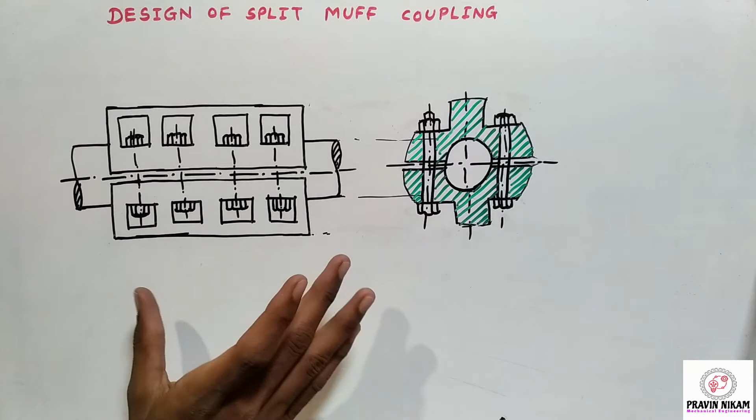So let us see, this is the split muff coupling. This is the front view, this is the side view. Now in the front view you can see what is there. This is the input shaft, and this is the output shaft.

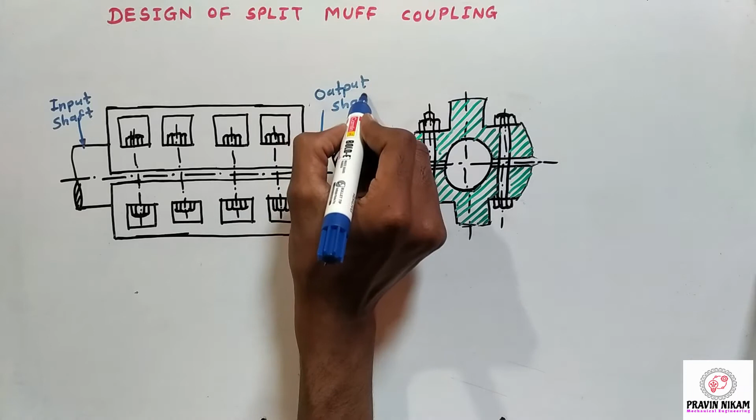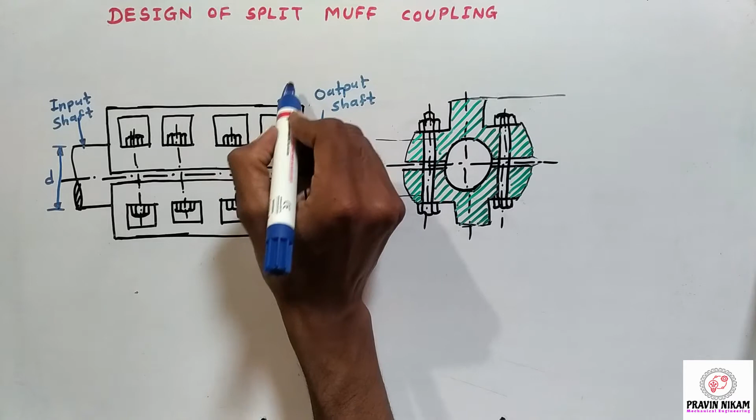Now the diameter of the input shaft is small d, diameter of the output shaft is small d. Then diameter of this sleeve - this is called sleeve. This is half of the sleeve, and this is another half of the sleeve. Inside you can see this is one half of the sleeve, this is the other half, and the clearance is provided between the two halves of the sleeve.

So this is also called a compression coupling or clamp coupling, because the two halves of the muff are clamped together by means of a number of bolts. Now this number of bolts is 4, 8, 12, 16, like this - in the multiple of 4.

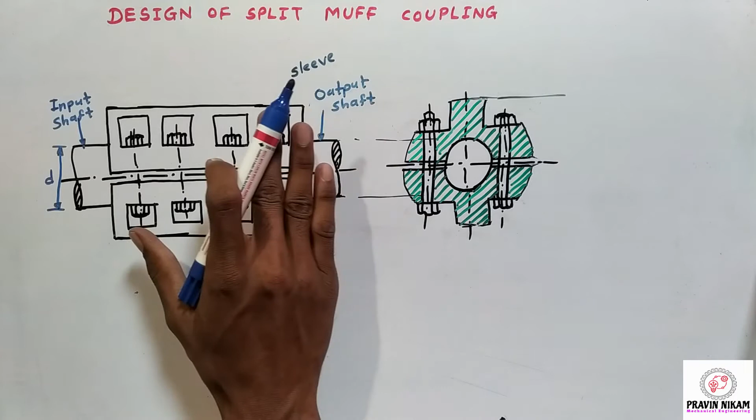Now in this coupling the sleeve is made of two halves which are split along a plane passing through the axis of the shaft. These two halves of the sleeve are clamped together by means of bolts, and they are always in multiples of 4. A small clearance is provided in the parting plane between the two halves.

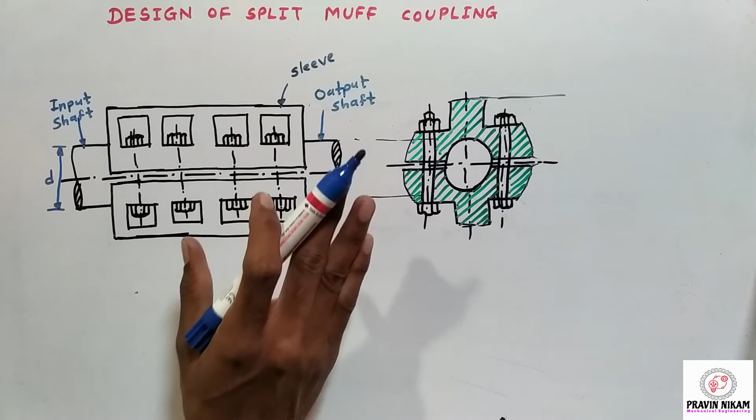Therefore, when the bolts are tightened, a force is exerted between the sleeve halves and the shaft. This force caused by clamping of bolts creates frictional force on the surface of the shaft. So the torque is transmitted by means of frictional force on the surface of the shaft. Now there is also a key present, so torque is transmitted also by the key.

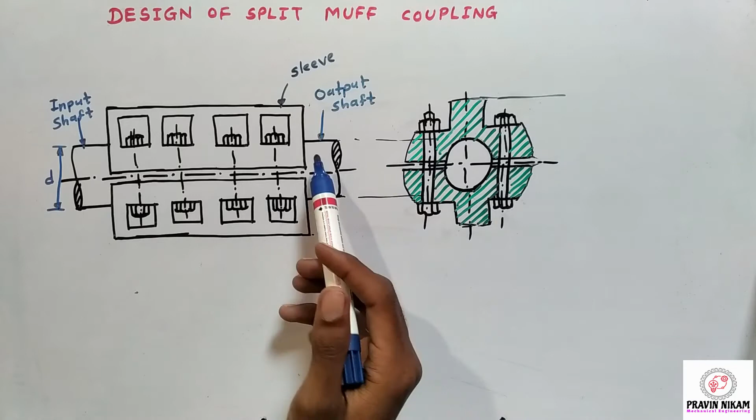Now how is power transmitted? So power from the input shaft is transmitted to the sleeve by frictional force, and also it is transmitted to the key and then the sleeve. Then the key and sleeve transmit this power to the output shaft, and you can use that output power for your application. So this is the working of the split muff coupling.

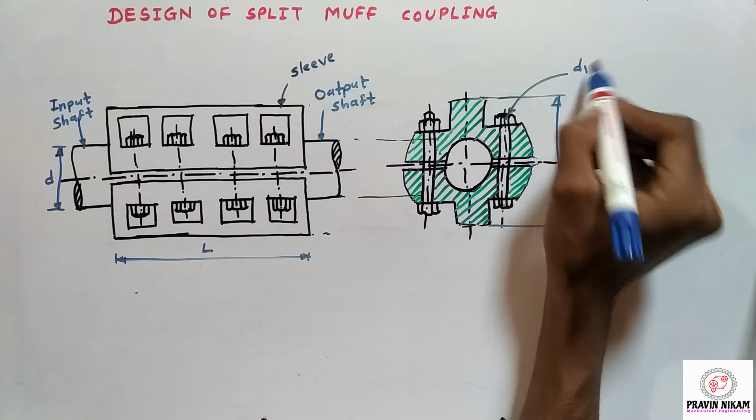Now let us see what are the dimensions of the split muff coupling. So this is the diameter of the shaft. Now the diameter of this sleeve is capital D, and the length of this sleeve is capital L. Now the diameter of this bolt is small d1.

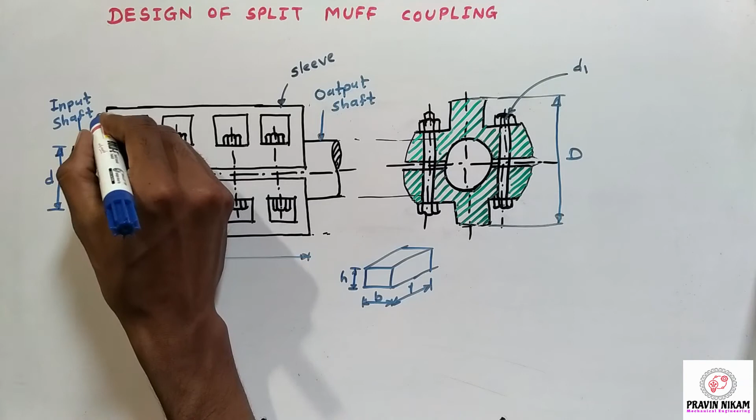Now this shaft transmits torque, the sleeve also transmits torque, and the key also transmits torque. So here torsional shear stress is acting on all components of the split muff coupling. Now let us see how to design a split muff coupling.

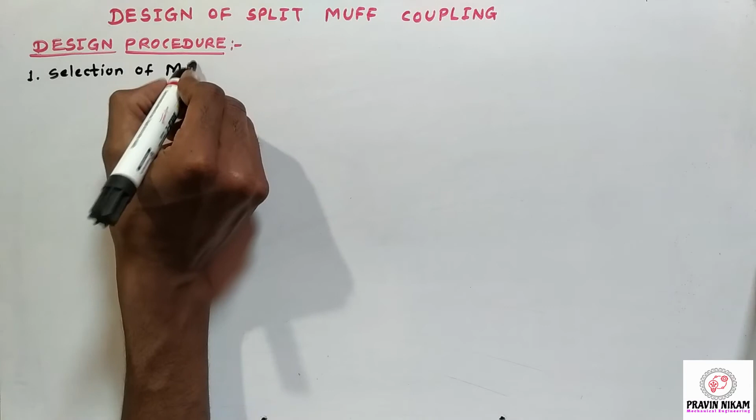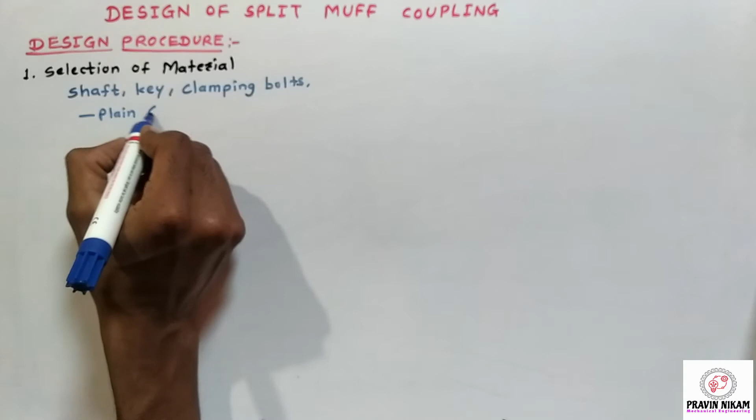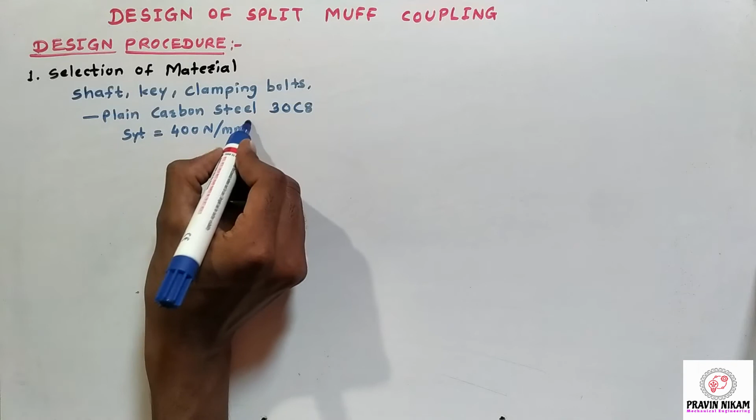Now see the design procedure. So the first step in the design of any mechanical component is selection of material. The material selected for the shaft, key and clamping bolts is plain carbon steel, because strength is the criteria of failure, so plain carbon steel is used. So you can use 30C8 having SYT 380 or 400 Newton per mm square. You are the designer, you can use it as per your knowledge of the design.

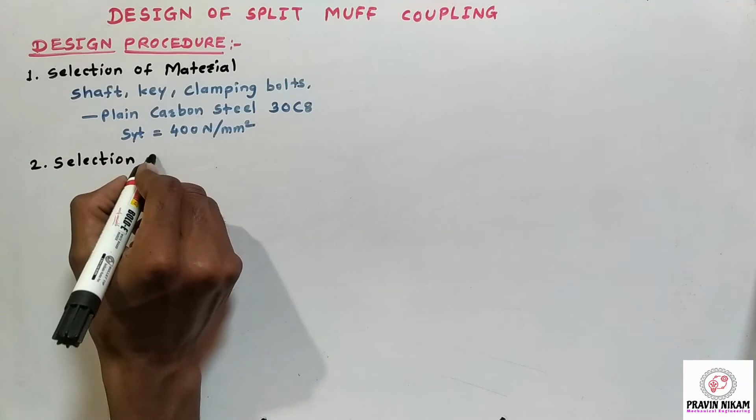Then the second step of the design is selection of factor of safety.

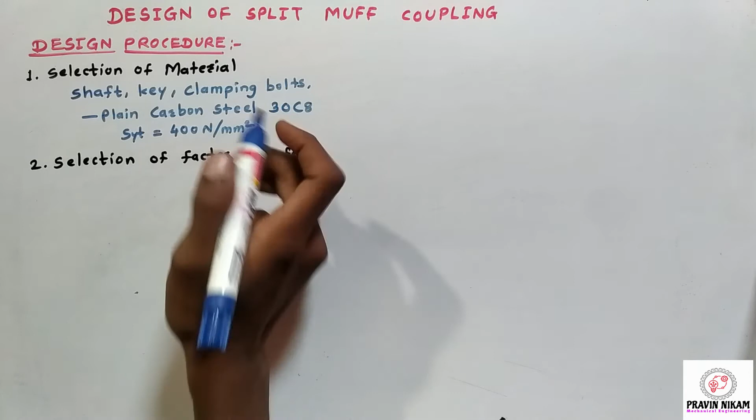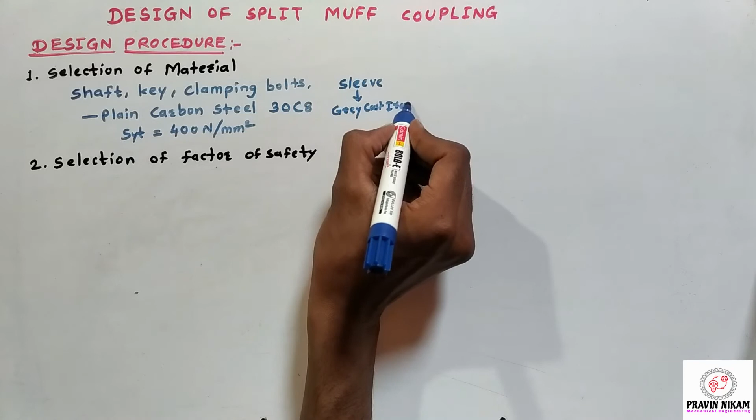So you can take factor of safety. Here one material is remaining. For shaft, key and clamping bolts the material is plain carbon steel, and for sleeve or muff, grey cast iron is used. Grey cast iron of grade say FG 200 is used. Here 200 means SUT, the ultimate tensile strength of the grey cast iron.

Now select factor of safety. You can select a low factor of safety for shaft, key and clamping bolts. For sleeve you can select a higher factor of safety, that is 5 or 6. So this is for shaft, key and clamping bolts, and this is for sleeve or muff.

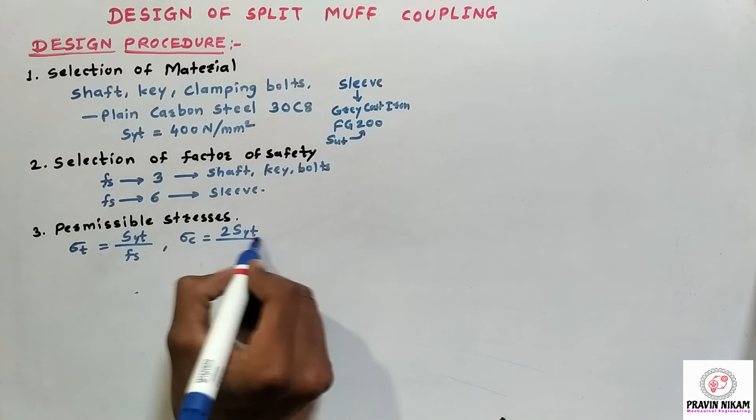Now the third step in the design is permissible stresses. Calculate permissible stresses. The permissible stresses are different for shaft, key, clamping bolts and sleeve. You can use sigma T is equal to SYT divided by factor of safety. Sigma C is equal to 2 SYT divided by factor of safety, and tau is equal to 0.5 SYT divided by factor of safety. So by using these formulas you can calculate permissible stresses for shaft, key, clamping bolts and sleeve also.

Then the fourth step is dimensions. Now what are the dimensions? First dimension is diameter of shaft, that is small d. So how to find out diameter of shaft? We know torque is transmitted by shaft, so torsional shear stress is acting on the shaft material.

So we know the formula tau is equal to 16T divided by pi d cube. Here T is unknown. So how to find out T? You can use the formula for power, P is equal to 2 pi NT divided by 60. This is the formula for power transmitted by shaft.

Then the second is dimensions of sleeve. There are two empirical relations. We know for sleeve there are two dimensions. One is the diameter of sleeve, given by the empirical relation 2.5 times diameter of shaft, and length of sleeve is given by 3.5 times diameter of shaft. So these are two empirical relations for dimensions of sleeve.

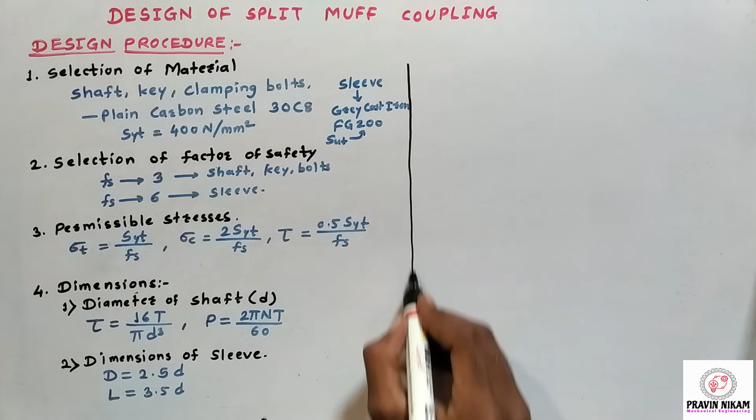Then the third dimension is dimensions of key. For square key, b is equal to h is equal to d by 4, and for rectangular key, b is equal to d by 4 and h is equal to d by 6. Now length of key is equal to length of sleeve divided by 2.

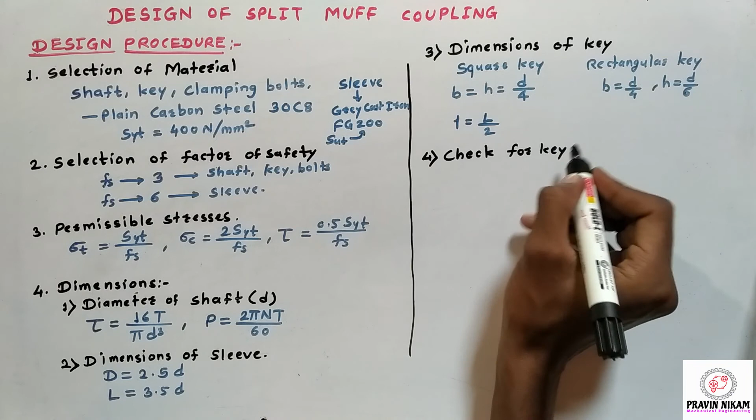Then the fourth step is check for key. You can check whether the design of key is safe or not. For checking purpose, there are two relations. One is torsional shear stress, tau is equal to 2T divided by d B l, and sigma c, that is crushing stress, is equal to 4T divided by d H l. So these are the two relations to check the design of key.

Now the next, fifth, is dimension or diameter of clamping bolt, that is D1, small d1. There are two empirical relations. One is if diameter is greater than 55 mm: d1 is equal to 0.15 times d plus 15. And another relation is if diameter is less than 55 mm: 0.10 d plus 10.

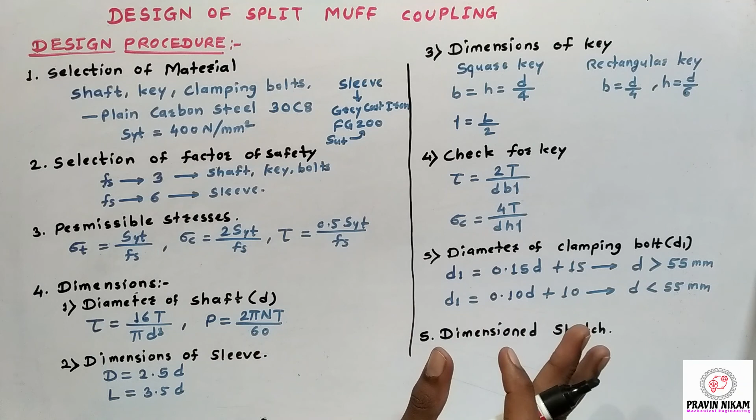And the last main step is the fifth main step, dimensioned sketch. In this step you can draw a drawing of split muff coupling by using all these dimensions. So this is the simple design procedure of split muff coupling. By using this design procedure, you can solve a design problem of split muff coupling.